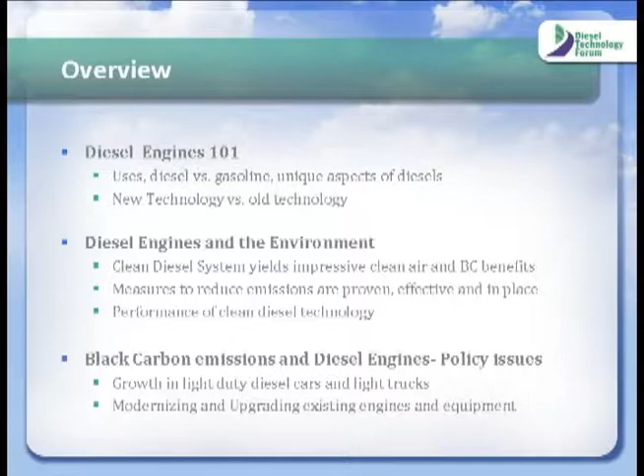How important are diesel engines? I think hopefully most folks in this room understand where these might be found. They power a large majority of transit buses, about two-thirds of all farm and construction equipment, over 90% of the big rigs on the open road, and lots of emergency backup generators. So diesels really are all over the place in terms of providing goods and services that we all use every day and depend on, sometimes thinking about it, sometimes not. It is a substantial part of our society today.

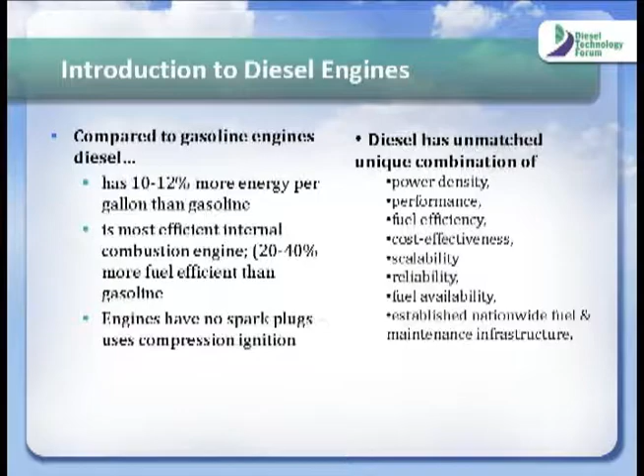Next slide. Looking at diesel, just to compare, a diesel engine is different than gasoline. It is the most inherently energy efficient internal combustion engine out there today, period. It has about 10 to 12% more energy, BTUs per gallon, than a gallon of gasoline, and the engine burns that fuel more efficiently, losing less of it to waste heat and other things.

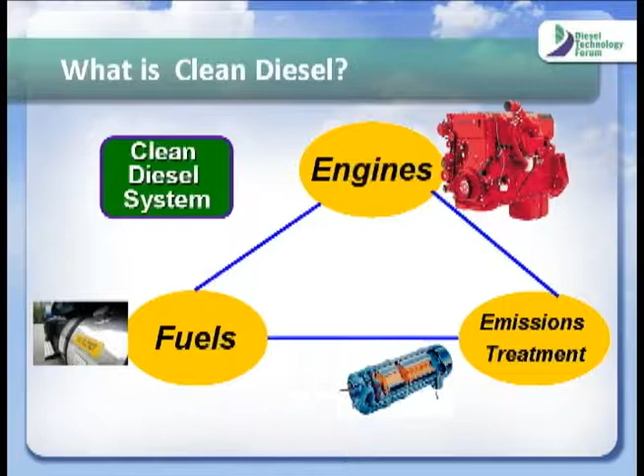Next slide. I'd like to focus our talk today in two parts. The first part is really about clean diesel, our new technology and new fuels that have been coming out for the last few years, and then address some older technology issues and what we can do there. I'm going to focus on the concept of a clean diesel system, which has three pieces: cleaner fuels, advanced clean burning engines, and emissions control technology.

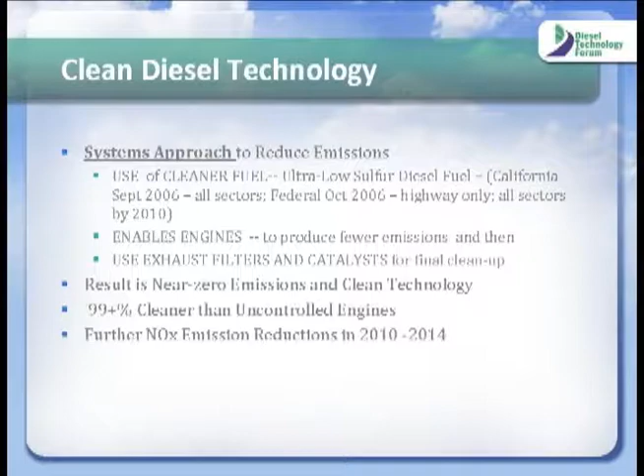Let me elaborate a little bit. First of all, next slide. On the fuel side, about almost 4 years ago now, we had a major transformation of highway diesel fuel in the U.S., going to what we call ultra-low sulfur diesel fuel, which had 97% fewer emissions of sulfur in the fuel. We're going to see that same fuel make its way into all off-road equipment nationwide starting June 1st of this year, just a few months away. So the fuel has gotten dramatically cleaner, and that is a very important point, because all the emission benefits from use of these other technologies to reduce emissions really depends on cleaner fuel.

And when you start thinking beyond the U.S. and some of the challenges we face from an international perspective, using a lot of these devices and advanced engines really becomes challenging when you don't have a clean fuel. It's just as simple as this: what goes into the engine has a lot to do with what comes out the other end.

We have a process now where we've seen new technology come online, and it is very clean. We think of new clean diesel as near 99%, over 99% cleaner than the past, and actually near zero emissions for fine particles, with more coming in the NOx area, which is important for ozone compliance here in the U.S. But we're really going to focus on particulate emissions going forward here.

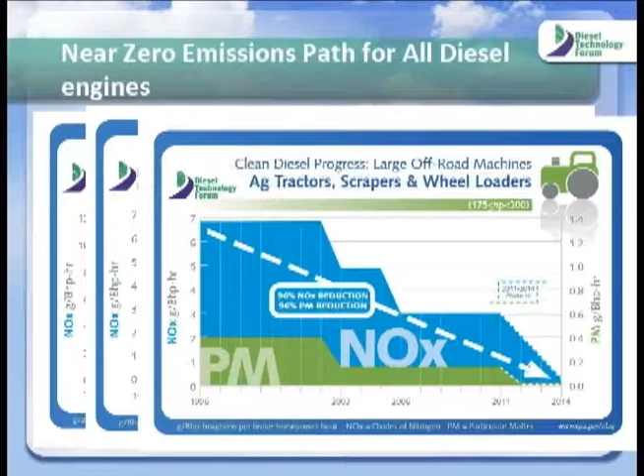Next slide. What I'd like to show you here is a series of charts showing the emission certification standards for new engines, both on and off-road. Click again, please. These are bulldozers and mining trucks, really big engines. These are agricultural tractors, wheel loaders, things you see like scooping snow off the streets of Washington not too many weeks ago. And then finally, heavy-duty diesel trucks.

In pretty much all of these instances, you see a trajectory where the emissions are going towards zero at the far right-hand corner of the graph. Particulate matter is on the right-hand axis, NOx emissions on the left-hand axis, and in each case the PM is in the green area. So we've had very low emissions of particles for highway vehicle engines really since 2007, and that permeates through these other technology sectors in the next few years.

This is an important point I want to make here. As you look back over time, I think this graph begins in the late 90s. One of the benefits about diesel engines is that they're very durable, and these are investments that governments make, that transit fleets make, and they want these to last a long time to provide the lowest cost of service. What happens then is that we have vehicles and equipment out there that is older than 5, 10, 15, in some cases 20 years. So that becomes an issue for looking at what we can do to reduce the emissions and overall impact from diesel technology.

So from a new perspective, we're on a very strong trajectory to make everything cleaner, from the smallest diesel engine to the largest marine boat and locomotive.

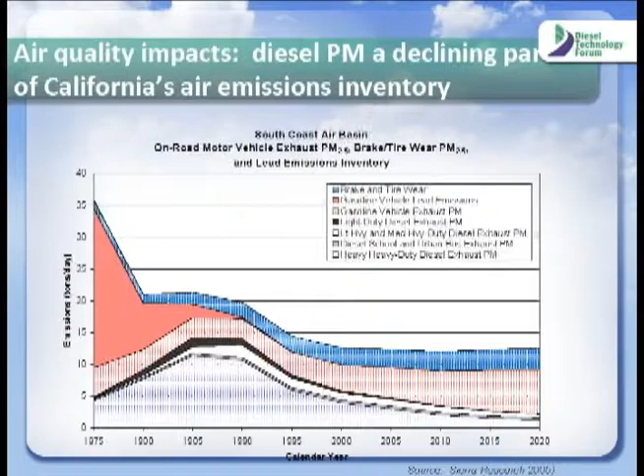Next slide, please. And is this having an effect on air quality? This is a graph that shows you, for the South Coast Air Basin in California, the relative contributors of the emissions inventory of fine particles. The diesel part is in the bottom 4 lines - light, medium, heavy duty, a couple of categories there coming together. The point I want to make is that in this year, 2010, adding all those diesel categories up for highway vehicles...

Actually, the contribution of fine particles in the south coast of California - more fine particles will come from brake and tire wear than from diesel engines that operate on the highways. And this factors in all the new regulations that have been put into place in the past, the cleaner fuels, and the new technology going forward in terms of projecting future benefit. So you can see the new standards are coming into effect, and we're already seeing some of the results of that in the air quality inventory.

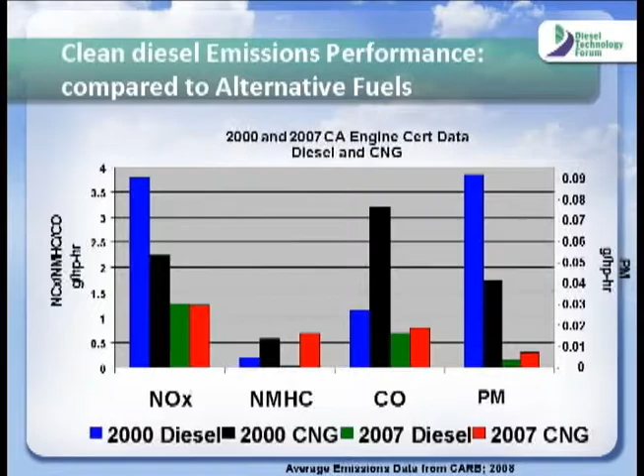Next slide, please. The industry has also made a very significant effort with this new generation of technology to prove that it is working as described. These are results from the certification of diesel engines and natural gas engines taken from the California Air Resources Board, looking at comparing 2000 generation and 2007.

2007 was a milestone year for PM, and that's why I focused on that. I'd like to call your attention to the far right-hand group of bars, and what we're looking at there is in 2000, this is the actual certification values of diesel engines for particle emissions. And natural gas, very low in 2000, lower, less than half the emissions of diesel from fine particles. Well, look what happens in 2007.

Natural gas also getting a lot lower in emissions of particles, but the diesel coming in actually even cleaner than natural gas. And of course, that's a real testament to this integrated clean diesel system that I talked about with the fuels, engines, and emissions control technology all working together. So from the certification data that allows manufacturers to sell engines in California, the proof is in the pudding for what's happening there. Next slide, please.

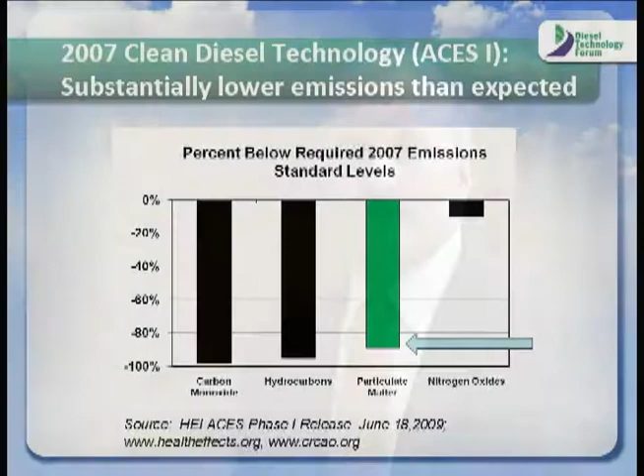That is not good enough. We have been working with the Health Effects Institute to evaluate on a very detailed basis the emissions performance of new diesel technology, and subjected 2007 generation engines to very substantial testing down at Southwest Research. This has been in conjunction with the Coordinating Research Council and other groups, but wanted to find out whether or not these engines are performing as they were told to be performing.

And this was done last year, and the release from the Health Effects Institute found that the engines are actually coming in 90% below where people expected that they would be. That's right, 90% cleaner than they might have expected.

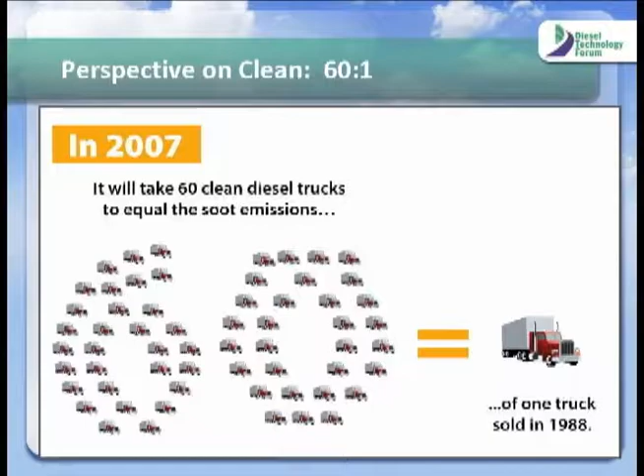This is really good news because it shows that the technology is robust and it's coming in well below what was projected for the emission standards that EPA set forward. To put that in a more simplistic perspective, think about it this way: a truck built in 1988 had the same amount of soot emissions as 60 trucks made in 2007.

Let's turn now to some very specific discussions about black carbon. It's important to point out, as we look at fine particles, that not 100% of particles are black carbon. For diesel, about 60%, as I recall, of the particle emissions are black carbon. The others are organic carbon.

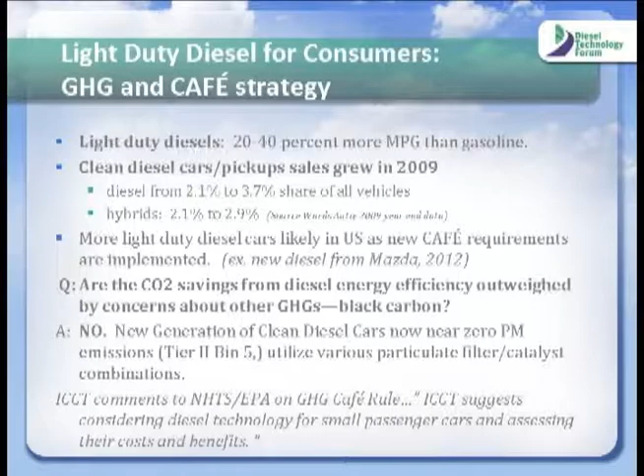First, I'd like to chat about the prospect of more fuel-efficient technology in the future for the U.S. As you all know, EPA has just put out a new greenhouse gas and fuel economy rule that requires manufacturers to meet much more aggressive fuel economy standards in the next couple of years. One question is whether more diesel engines might be used to help meet that. Certainly you're hearing a lot about hybrid technology being used to help meet the more fuel-efficient requirements, but how about clean diesel? And why would people be thinking about diesel?

Go back to one of the earlier slides: diesel is 20 to 40% more fuel efficient. It burns less fuel to do the same amount of work than a gasoline engine, so less fuel consumed per mile of operation. In 2009, sales of diesels were actually much higher than for hybrids, so people are investing in some of the new technology. We've had recent announcements of even more manufacturers coming out in the future.

So a question that comes up in the policy world is: are the CO2 savings you get from diesels likely to be impacted or negated by black carbon emissions in terms of global warming potential, if you look at the total? The answer, from our perspective, is absolutely not. The new generation of technology now has near zero PM emissions, very, very low emissions of particles, what EPA calls Tier 2 Bin 5, and they all utilize various particulate filter and catalyst combinations. So you've got a little scrubber system on the exhaust that's taking care of the last amount of emissions coming out of the engine.

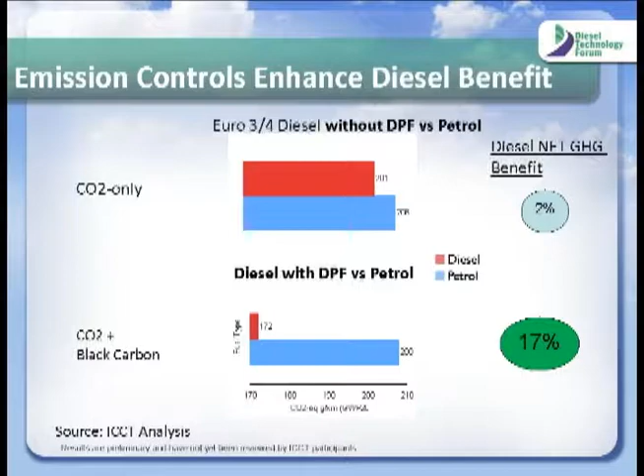To put that in perspective graphically, if we consider the impact of diesel on global warming as a total consideration, we look at the top set of bars. If we only consider carbon dioxide emissions, you see the fuel efficiency advantage of diesel still there over gasoline, represented as petrol here. This is looking at Euro 3 and 4, about the same as the current generation diesel cars and gasoline cars in the U.S. The top set of bars looks at diesel without a particulate trap, which is a bit of an off comparison, because all the diesels coming out have particulate traps to meet the low standards. So the net benefit of greenhouse gas there is 2% if you look at just that.

But if you factor in carbon dioxide and black carbon on the bottom, you see that the ability to reduce those black carbon particles is dramatic, resulting in a net greenhouse gas benefit of about 17%. So this gets to that policy question: would using more diesel cars in the U.S. be a good thing for climate change?

And again, the answer we think to that is yes.

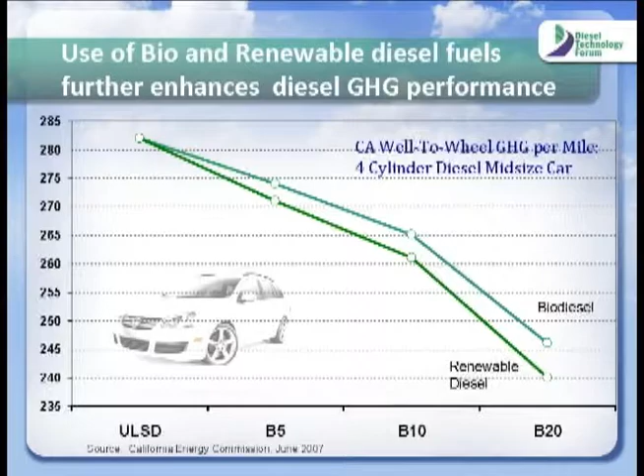There are other considerations and policy issues, and certainly using renewable fuels is something that folks are looking at. I wanted to share that using either first generation or second generation biodiesel or renewable diesel fuel can have additional positive impacts on global warming overall. Most of this is not about black carbon emissions for new technology, but it would have some effect probably on the older fleet that's out there.

This is a California ARB, or Energy Commission, analysis of wells to wheels. If you use these fuels in a mid-sized diesel car like a Volkswagen Jetta wagon, the ultra-low sulfur diesel is represented on the left, showing CO2 equivalent emissions, and you can see the reductions you get with increasing percentages of renewable and biofuels. So that again is part of the strategy.

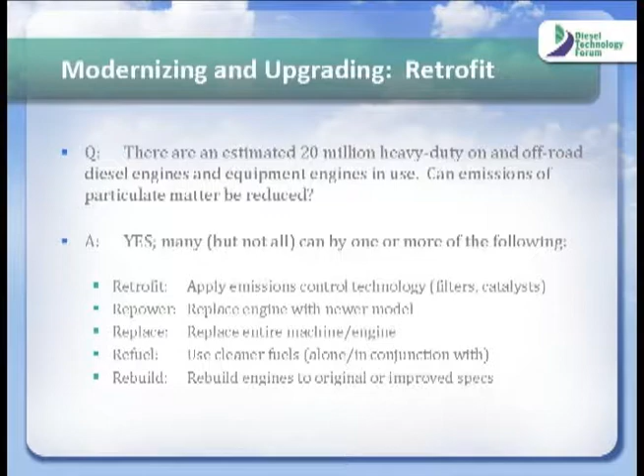I'd like to finish up with a discussion about one of the main topics of interest, which is what do we do about the existing engines and technology out there? These are capital assets that construction companies have invested in. They still have plenty of years of useful life, they're doing the work we all need, and they've helped keep construction transportation costs low by their long-term value. But we are finding with some of the new technology and the widespread availability of clean diesel fuel that we can take steps toward reducing emissions from this existing fleet.

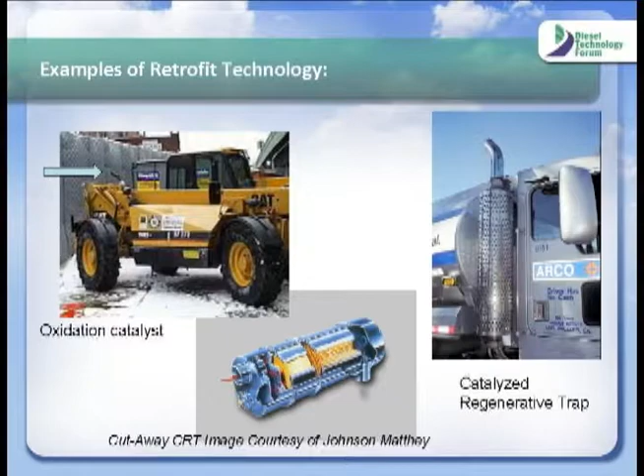There are a number of strategies to do that, and some of those involve putting the kind of devices you're seeing here onto various machines and equipment. It cannot be done in every case because of a variety of factors, but it can be done in many cases. We're learning a lot about school buses—it works pretty well. Transit buses and some off-road equipment are using more and more of it. Last year, about 20,000 diesel engines, trucks, machines, and equipment did have some kind of retrofit solution applied to them, and that's largely the result of some policy initiatives in the U.S.

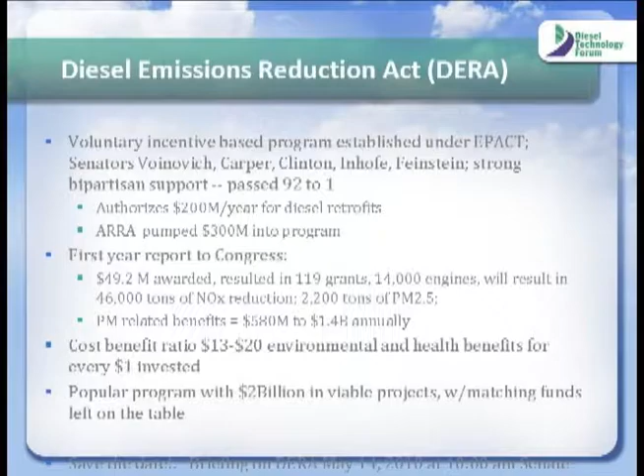Many of you might be familiar with the Diesel Emissions Reduction Act, which was enacted back in 2005. Senators Voinovich and Carper were the main organizers of that. This program put the idea out there that we can upgrade and modernize existing engines, and there's a way to go about that. If we offer some incentive funding, that can happen.

There has been funds put into upgrading and modernizing diesel engines that has been quite successful, resulting in a reduction of about 2,200 tons of fine particles so far, with more to come. It's a very cost-effective approach—for every dollar invested, you get anywhere from $13 to $20 of benefits from environmental and public health benefits. So it's a popular program with fleets and communities around the country. Everybody wants a piece of it, and this last time around, the money and projects were left on the table.

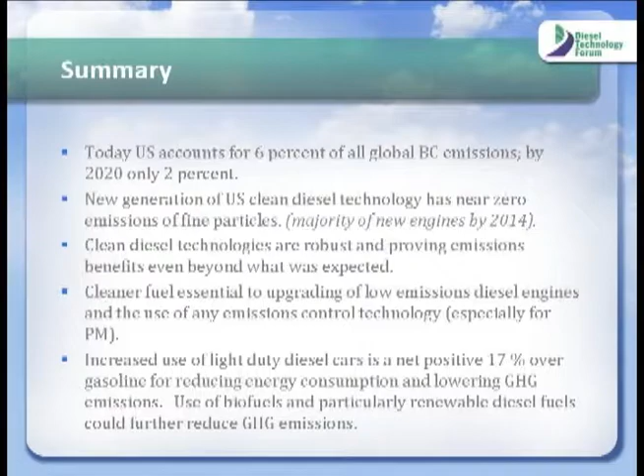So to sort of wrap things up, going back to that macro level, the U.S. accounts for, as Tammy's presentation said, 6% of all global black carbon emissions. By 2020, because of these regulations in place, there is a substantial reduction in that. The new generation of technology is well on its way to reducing all kinds of emissions from diesel engines, and it's proven to be working.

I think the challenge we have overall is things like what's happening in the last 18 months. As the economy is hit, that's delayed the acquisition of new technology, and so that means some of the older equipment will stay on the road longer. That makes a case for thinking more broadly about modernizing and upgrading diesel engines. And finally, we can think of using more clean diesel engines in cars and light trucks as a global warming solution.